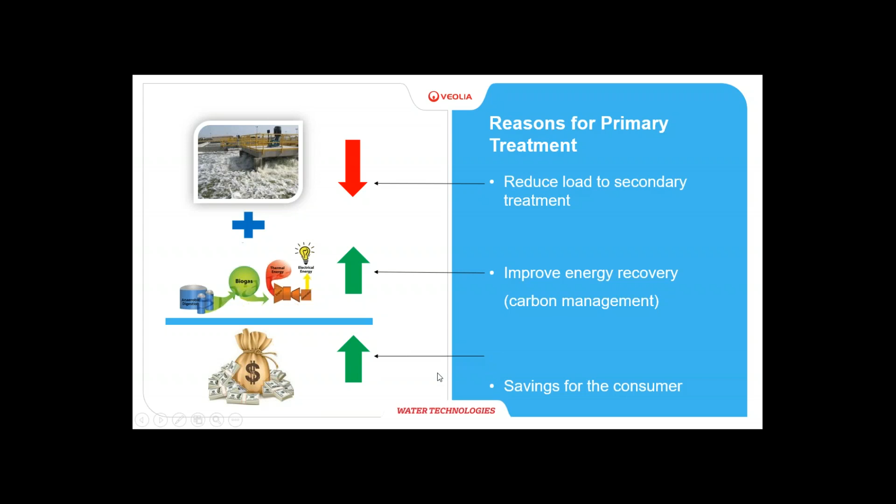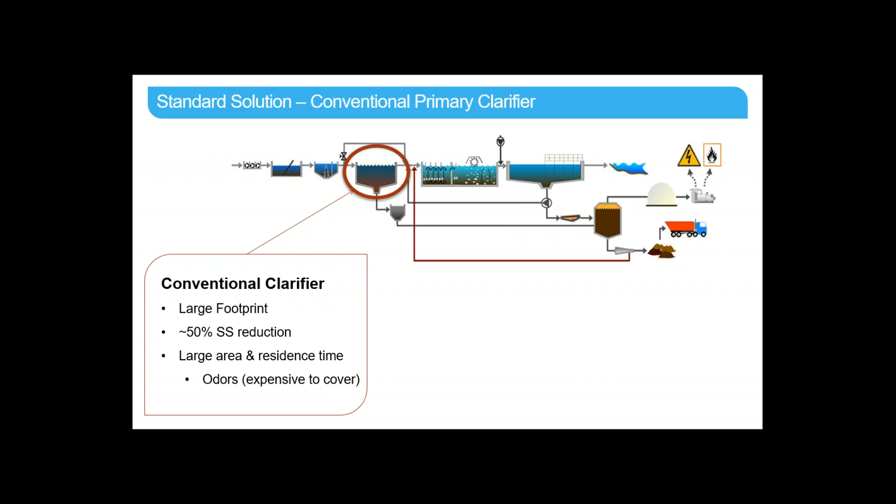In a standard conventional plant, normally we would do this with conventional primary clarifiers, a large footprint device, large area, and large retention time. You would expect to achieve about 50% suspended solids reduction. And one of the side items that does occur with this large area and residence time is odors. These devices can be expensive to cover and difficult at times to deal with the odors associated with that.

So when we speak of advanced primary treatment, there are a number of technologies today that are considered advanced, but in today's talk we'll be focusing on the Hydrotech technology. This is a Veolia technology. It's been in development and being sold since the 1990s. So it's a very established technology, and specifically for primary treatment has been in use since the early 2000s.

What are the characteristics of Hydrotech compared to conventional clarification? It's a very small footprint device, a fraction of the conventional clarifier, and we'll share that in more detail in just a few moments.

In terms of performance, you can also achieve the 50% suspended solids reduction that you would get with a conventional clarifier. But in addition to that, you can actually, with chemical pretreatment, achieve greater than 90% suspended solids reduction. An interesting aspect to this is that the removal, whether of TSS or total phosphorus, COD, these can be targeted using a chemical pretreatment scheme.

These units are covered. They have a short residence time. The operation and maintenance is very easy and straightforward. As we talked about the side issue with the conventional clarifiers being the odors, here with this technology, the odors can be reduced and are much easier to control because of the covered nature of the units as well as the short residence time.

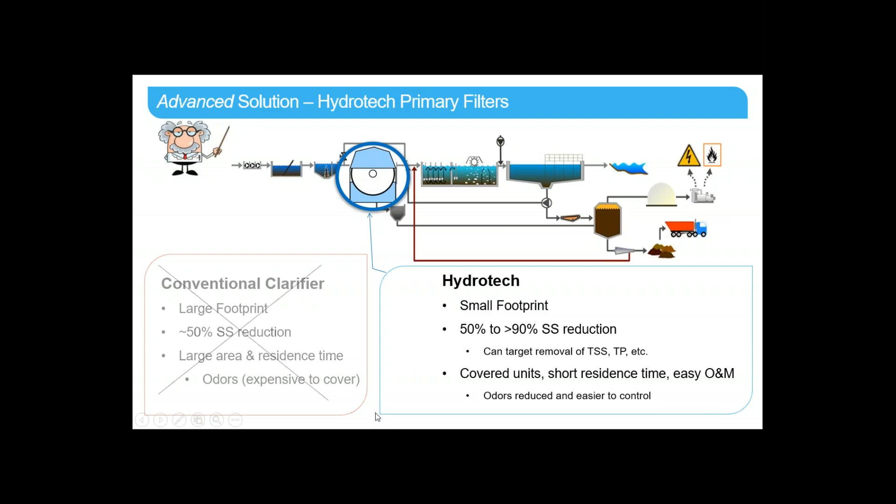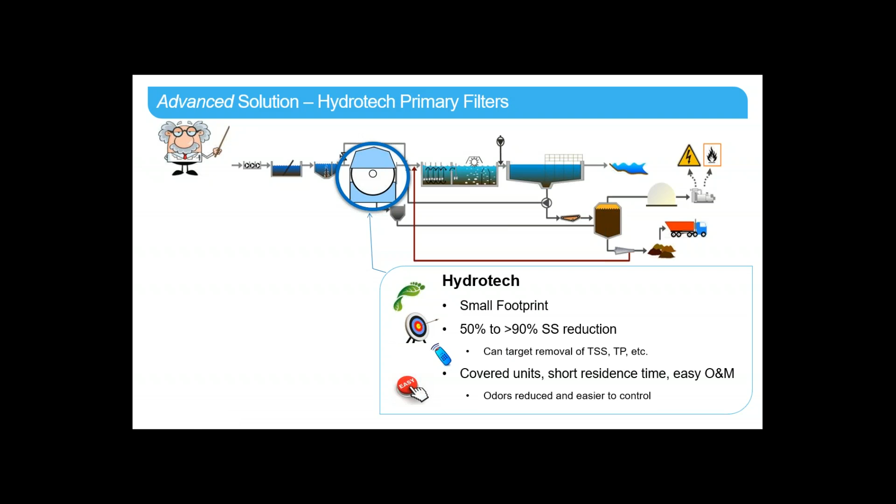So in today's talk, we're going to focus on 4 key areas of benefits with this technology: footprint, performance, control, and the easy operation and maintenance associated with the technology.

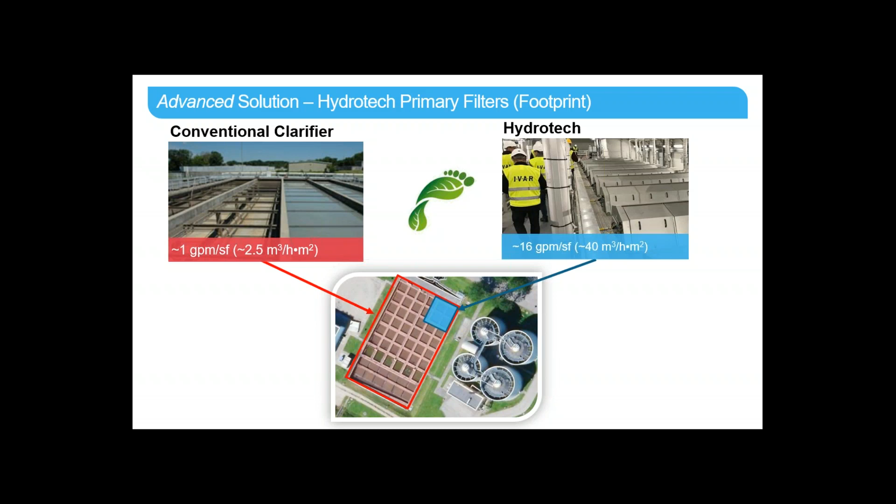So we'll move first into the footprint aspect. Compared to conventional clarifiers, the benefit is fairly straightforward and easy to see. A conventional clarifier would typically be designed at about 1 gallon per minute per square foot, or about 2.5 cubic meters per hour per meter squared of footprint area. With the Hydrotech filters, you can design these up to about 16 gallons per minute per square foot, or about 40 cubic meters per hour per meter squared. So as you can see, a fraction of the footprint is used compared to conventional clarifiers for the Hydrotech technology.

I thought it'd be interesting to share a specific site reference here, a location in Stavanger, Norway. This is a plant designed with 500,000 population equivalent. The peak flow design is 65 million gallons per day, or just over 10,000 cubic meters per hour, and they see inlet TSS up to about 300 milligrams per liter.

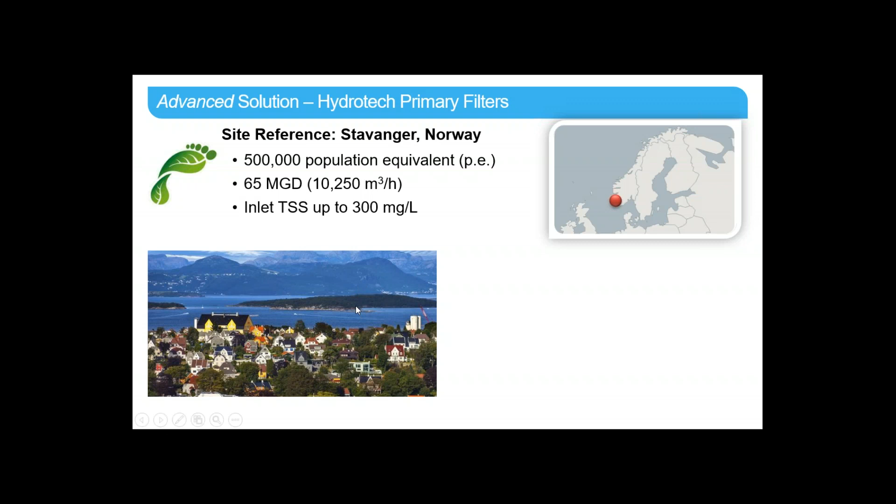Beautiful location in Norway, but you'll also notice that it's quite mountainous. This was one of the big challenges with this site: when they were looking at this location for their primary treatment, they would be needing to put it inside a mountain. This location is quite landlocked, so the primary treatment would be going inside caverns. The cost of installation was at a premium in order to locate the primary treatment within the mountain at the site.

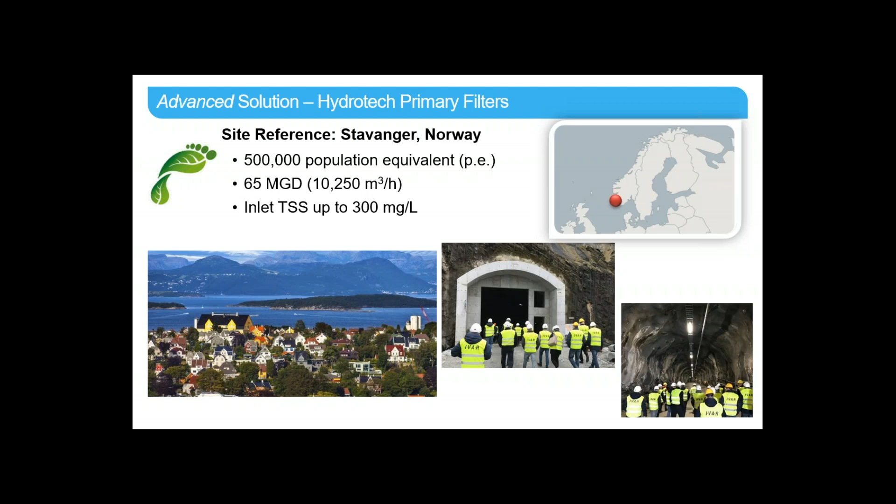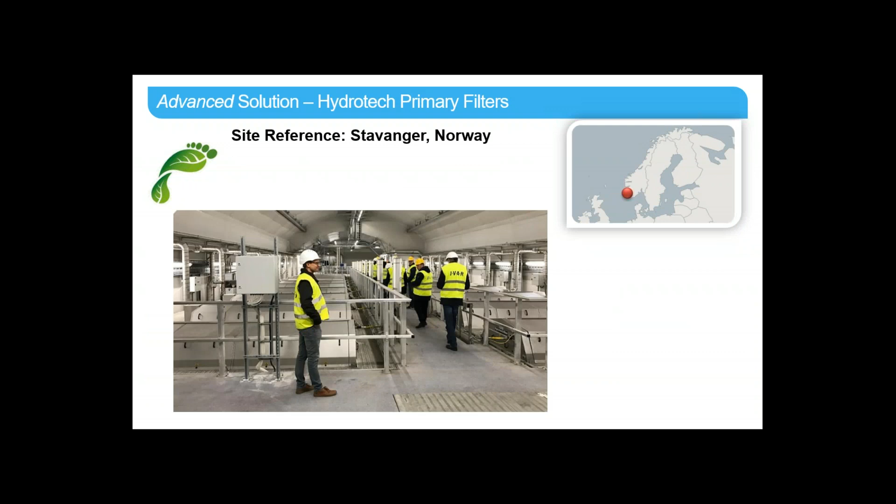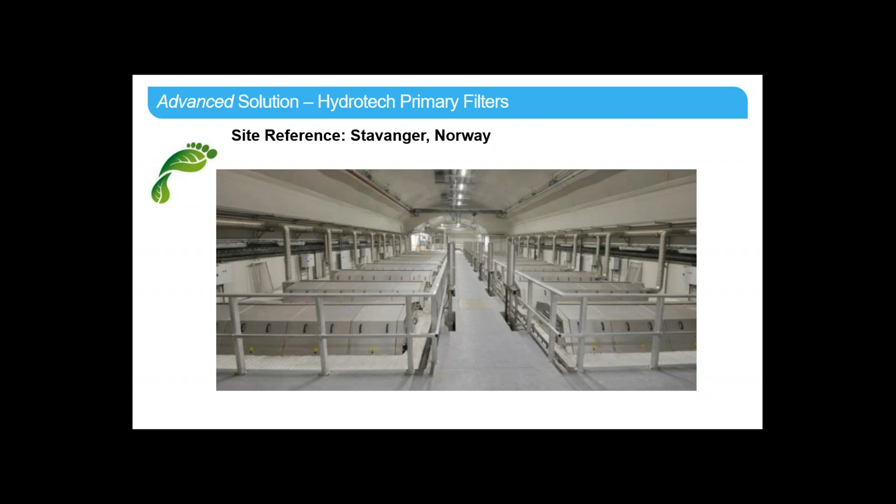The site looked at a number of technologies, both conventional as well as other types of advanced primary treatment technologies, and did select the Hydrotech filters. You can see here the location inside the cavern where the filters are installed. This has 20 of our drum filter units up and running here now for about a year or so. I believe the startup date was early last year, 2017, here in Stavanger, Norway.

So that highlights the footprint advantage. And at this point, I'm going to turn the presentation over to my colleague Carlos, and he's going to be sharing about the aspects of performance.

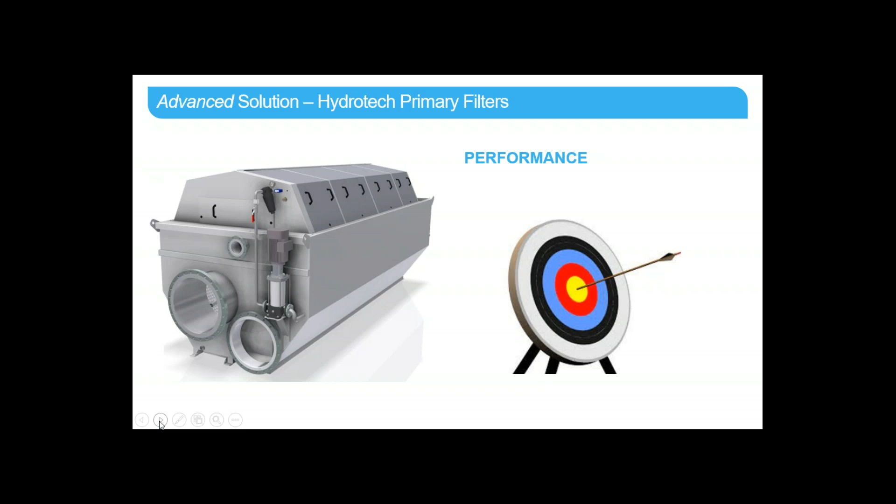Thank you very much, Mark, and thank you everyone for being there. I would like to invite you all on a trip around the world in order to showcase the performance of our machines when they are installed in a primary treatment line.

Before we do that, I would like to introduce you to the different modes of operation for Hydrotech filters in primary wastewater treatment. You can choose to operate the unit in 3 different ways. You can decide not to use any chemicals, in which case you will achieve an average removal of about 50% of TSS. If you add a bit of polymer upstream in a flocculation tank and allow the flocks to get larger and stronger, you will be able to boost the TSS removal up to 90%. If you further add some coagulant upstream of the flocculation tank, you will not only increase the removal by 5% compared to the previous case, but you will also be able to remove some phosphorus.

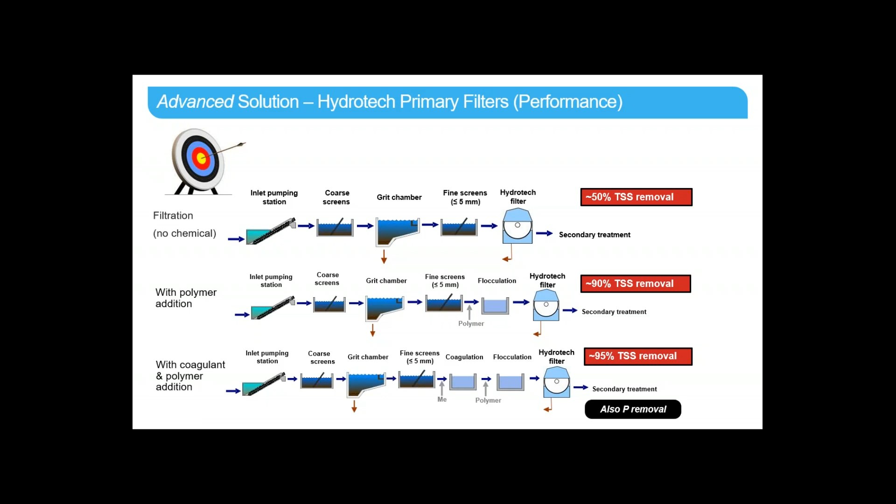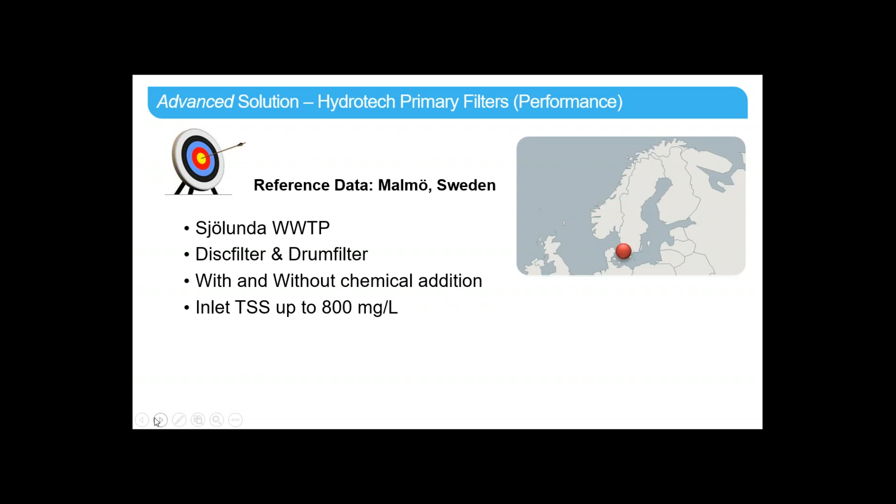So let's start our trip in Sweden, home of Hydrotech. We performed some pilot tests in the Sjölunda wastewater treatment plant located in Malmö. We piloted with both disc filters and drum filters, with and without chemical addition. And here you can see the results. In blue and gray, you can see the performance of both disc and drum filter without chemicals.

As you can see, the dots align quite well with the removals that I mentioned before. We were able to achieve more than 50% TSS removal on average. When we added a bit of polymer upstream of the disc or drum filter, those removals, shown here in yellow and blue, got enhanced to 90% on average, as you can see in this graph.

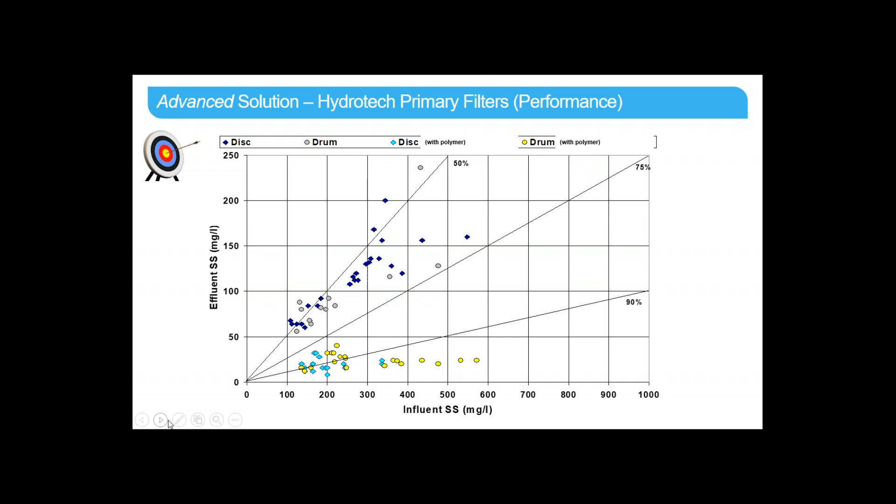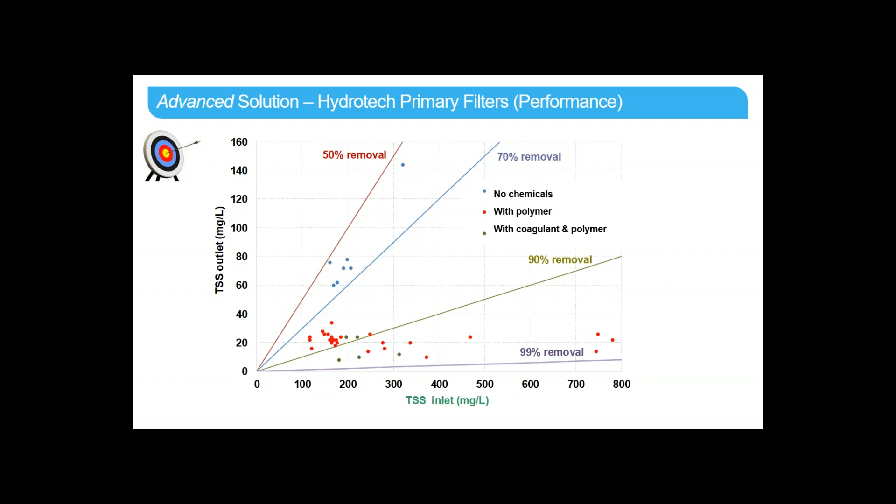Here you can see another data set that confirms the numbers I have already presented. In blue, you can see the removals achieved without chemical addition, which were in average above 50%. When adding a bit of polymer, the removals got between 80 and 90% in average. In green, you can see the removals we were able to achieve when both coagulant and polymer were added upstream of the filter. In that case, the removals of TSS were above 90% in average, and we were also able to remove phosphorus.

This is not just something that we are saying ourselves and that we have tested ourselves. It's also something that has been verified and validated. Hydrotech is the only primary treatment microscreen technology that's in the ETV register for green technologies. The ETV register is basically a database of green technologies with different claims, and those claims must be validated by an independent ISO 17020 certified verification body.

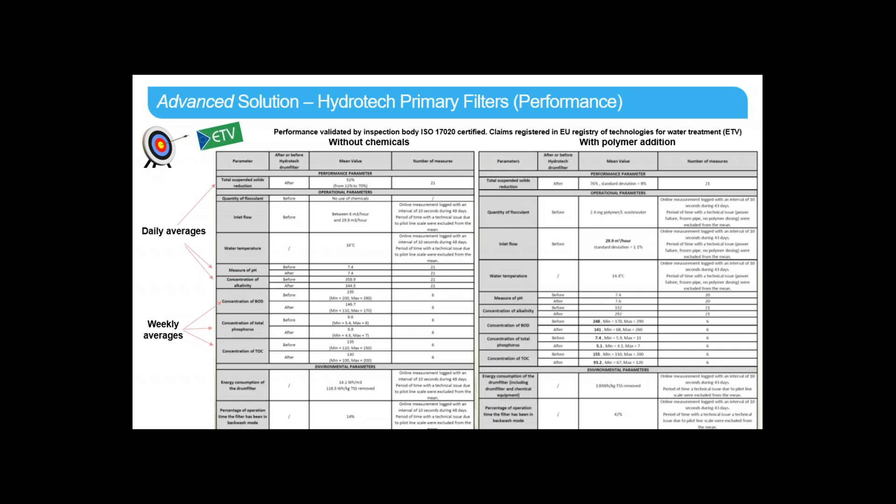Here in these two tables, you can see the results from that verification, both without chemicals on the left and with polymer addition on the right. The results in terms of TSS removal are in line with what I mentioned before. If you don't add any polymer upstream, we were able to achieve 51% TSS removal in average. By adding 2.4 milligrams of polymer per liter, we were able to achieve 76% TSS removal in average. You have to be aware that the removals can be enhanced if higher polymer doses are applied in the system.

Please, let's continue our trip through Denmark. In the north of Copenhagen, we have the Mölleåverket wastewater treatment plant, where they have 4 primary clarifiers. You can see them highlighted in red. They had some issues with them and needed serious renovation. So the client selected Hydrotech to perform primary treatment with chemical addition upstream, because they wanted to control the COD removal and release some of the primary clarifiers for water storage purposes.

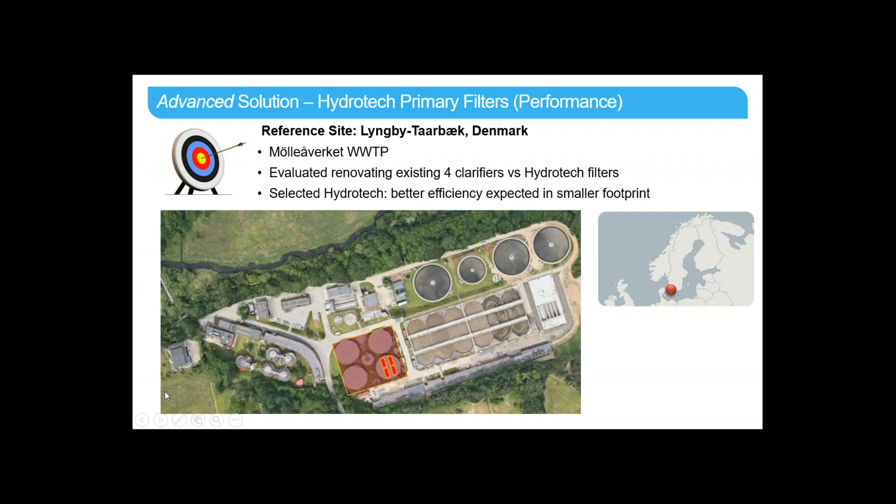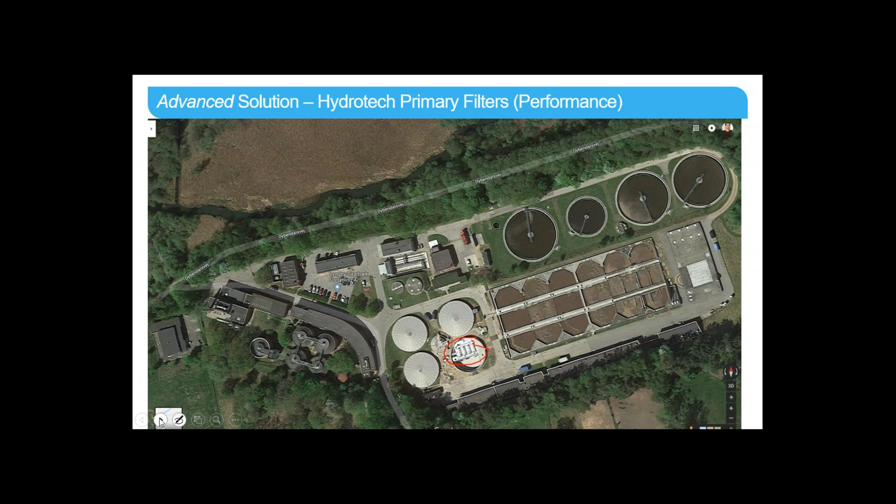The plant is still under commissioning. It's able to treat 925 liters per second. Here you can see the effluent turbidities recorded over the last 15 days. As you can see, the average turbidity out of the drum filters has been around 100 FNUs. The inlet to the plant is about 250 to 1000 milligrams suspended solids per liter. The first results we have analyzed in the lab suggest removals of about 70 to 90% in terms of TSS.

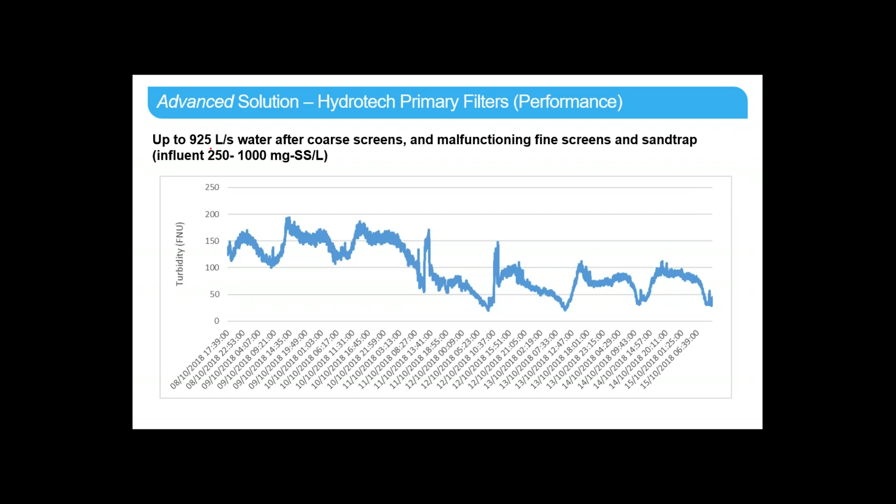Let's continue our trip, and this is actually our last slide referring to data. The trip continues in Sweden, central Sweden. The city of Avesta has a wastewater treatment plant called Näs, which was started up in 2010. They have a drum filter and a 2-stage chemical precipitation system upstream in order to remove phosphorus. The highlight of this installation is that the treatment line is purely mechanical. There is no biological treatment.

Here you can see how the filters were able to remove more than 85% of the TSS in average, and how the phosphorus out of the drum filters was always below 2 milligrams per liter, which is the target effluent demand for phosphorus in this part of Sweden. The concentrations in the inlet of the drum filter were as high as 12 milligrams of phosphorus per liter.

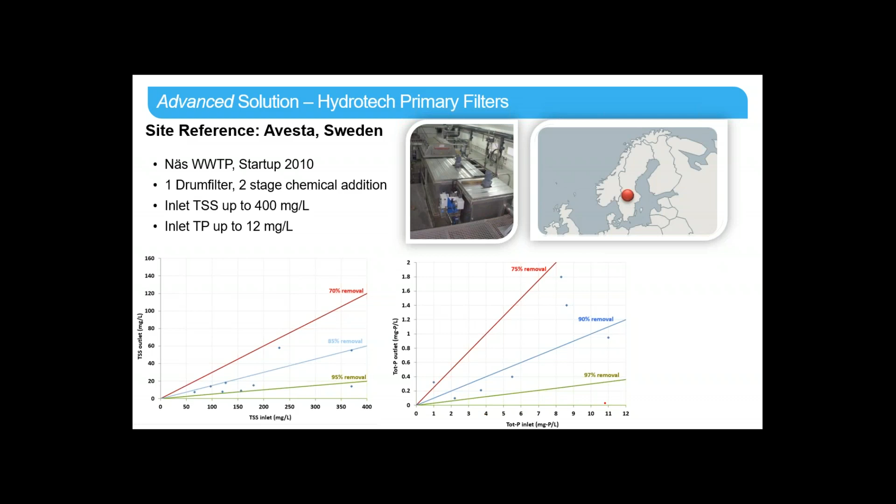Some of you may be thinking if all this chemical addition makes sense, and this slide is actually for you. This is a life cycle assessment conducted by an independent body in Germany, the Competence Center of Berlin. They benchmarked 3 different technologies in terms of cumulative energy demand and global warming potential, under the same conditions, meaning all 3 plants were receiving the same influent, and all 3 sets of technologies had to treat the water down to the same target values in the effluent. Here you have the legend for the different factors contributing to both the global warming potential and the cumulative energy demand.

And you can see here how the microscreen with chemical pretreatment upstream actually benchmarked better than the reference conventional activated sludge without primary treatment, both in terms of cumulative energy demand and global warming potential.

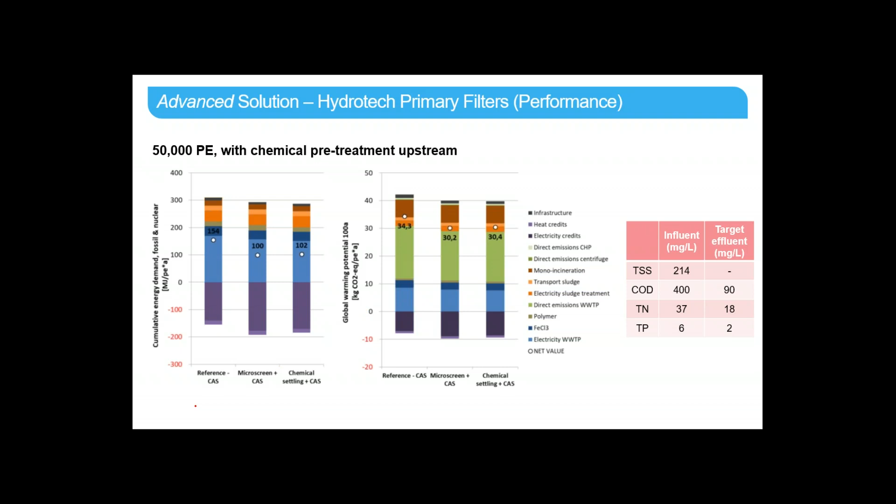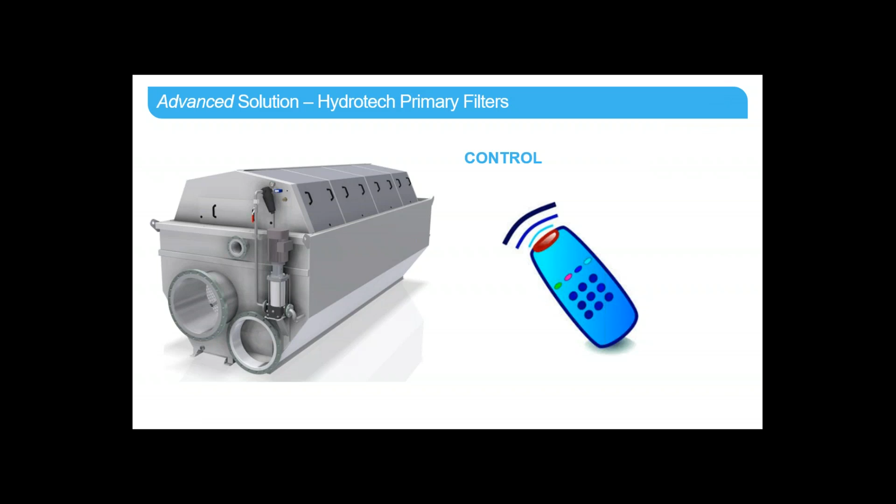Thank you so much, Carlos. We're going to be moving now to the third topic for the benefits, and that's the aspect of control. I think a good key question to ask is, why would it be important to have any type of very detailed control on the carbon removal? So I just highlighted a few key things here.

One would be to minimize aeration costs. As we said from the outset, that's definitely a big cost contributor at the wastewater treatment facility, perhaps the largest. But we've seen in our calculations that the chemical dosage costs associated with polymer addition upstream of the Hydrotech primary filters is actually quite a bit less than the savings achieved from reductions in aeration. In other words, it would be a benefit to the client, even though there may be some added cost for dosing the chemicals associated with the added removal. That added removal would result in a savings, a reduction in the aeration, and an overall savings to the client.

Next, of course, would be to maximize the biofuel production. The more we can remove, the more we can send to the anaerobic digestion, and the more energy that we can produce out of that carbon. However, having said both of those two bullets, it's important to put those together with the third, which is to stabilize the carbon to nitrogen ratio.

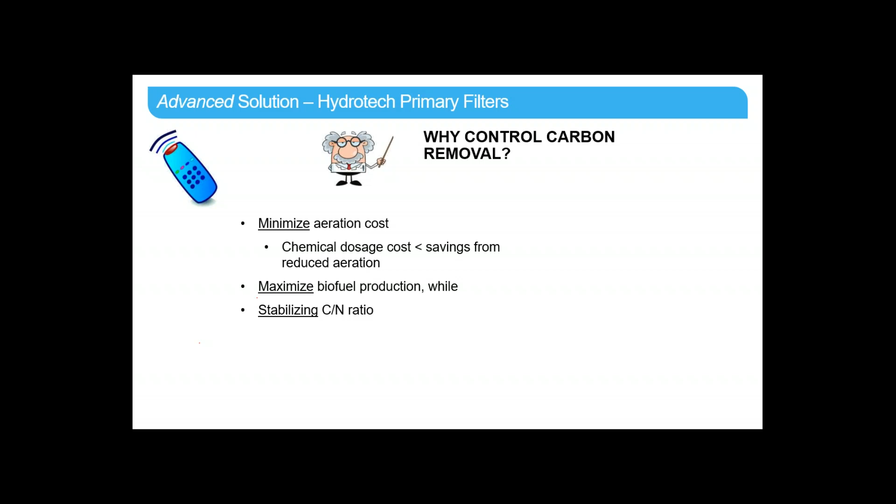When we talk about that, it may be helpful to think about an example. Say an example wastewater treatment plant may have an influent total nitrogen of 35 milligrams per liter. A desired carbon to nitrogen ratio is typically about 8:1 to achieve full denitrification using that incoming carbon. We'd like to eliminate the need to remove so much carbon that we then have to introduce another source of carbon prior to the biology. We don't want to add cost in later because we removed too much carbon.

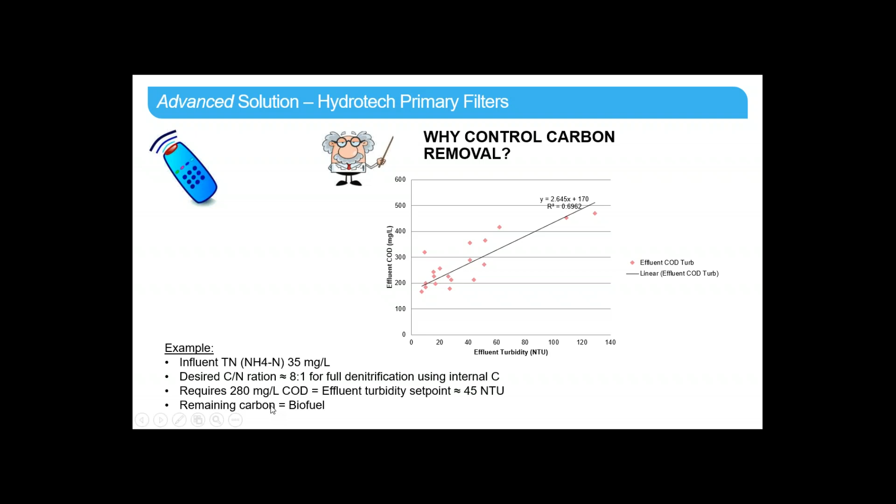So if you look here at this graph, this is an example relationship between COD and turbidity, and you can see it tracks fairly well. If we want an 8:1 ratio of carbon to nitrogen, and our nitrogen is 35 milligrams per liter, that would mean our carbon target would be 280, 8 times 35. Looking at this relationship, 280 would target about 45 turbidity as our target after primary treatment going into our biological system. All the remaining carbon that we would then be removing out could be used for the biofuel.

We've done this a number of times using a fairly straightforward PI, or proportional integral, controller feedback control loop. This is not something new, it's about 100 years old. It's well-proven technology, a well-proven algorithm to do this. You could also combine this with feed-forward control. Combining feed-forward control with PI feedback control is a bit more complex algorithm, but it does give a faster response. But we've actually seen with our application that this is probably a bit more complex than actually needed, that the basic PI feedback control loop really achieves very good results.

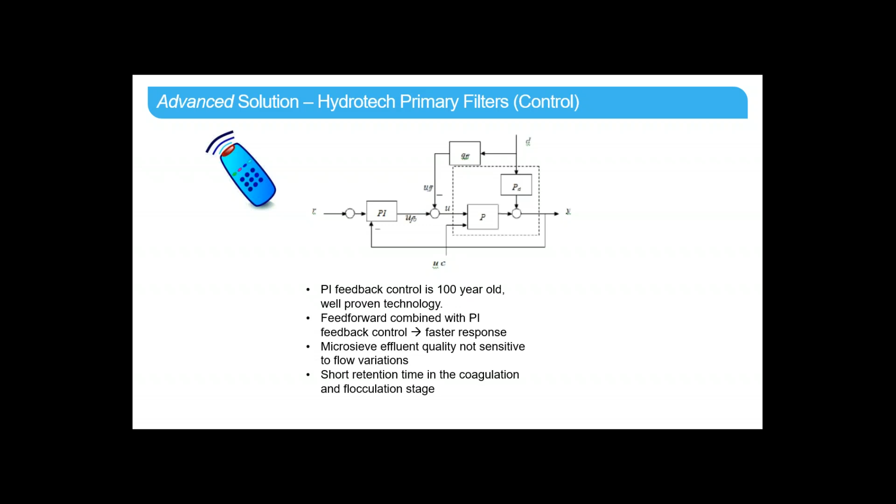We've also seen that our effluent from the Hydrotech filters is not really sensitive to flow variations when using this type of control system. I think a big part of that is the short retention times we see, both in the unit itself, which has a very, very short retention time, as well as in the coagulation and flocculation stages ahead of the filters. If coagulant is used, typically we're talking a 2 to 3 minute retention time, and with the polymer stage, about the same. So if only polymer is used, you're only looking at a 2 to 3 minute retention time stage, and even with a combined coagulant and polymer, a total of a few minutes to maybe a max of 10 minutes total retention time when those are added up.

And how is this done? You can see here a little basic schematic. We would take a PLC, with feedback control taken from an analog measurement, for example turbidity, feeding back to the PLC and controlling, using the PI control algorithm, the chemical feed, polymer and or coagulant. And as I said a minute ago, to make this faster, you could add a feed-forward aspect, using flow or turbidity feeding back to the PLC, to provide an even faster response on the control. I've got a couple of photos here to show both pilot setups that have been done as well as full scale.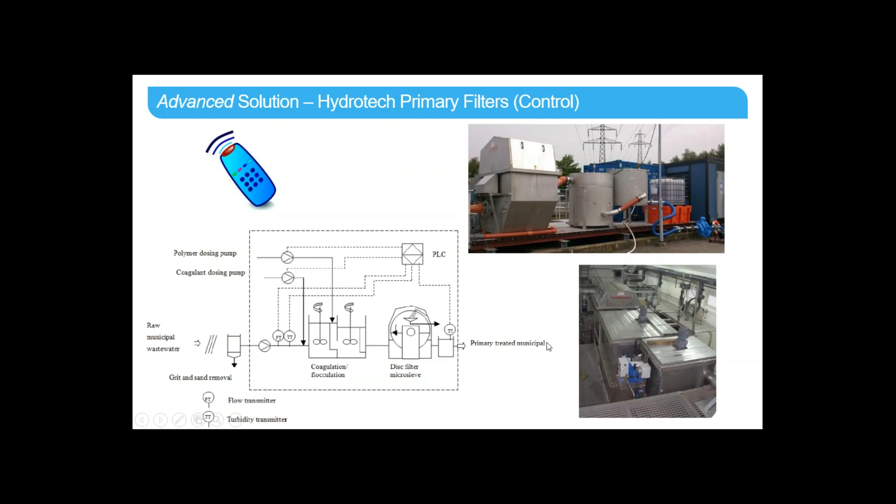Okay, so here's a graph to show some of these results.

Up at the top here, this gray trend is the coagulant dose for this particular trial that was run. The blue is the polymer dose. So both of those are being controlled. The red is the inlet turbidity. You can see the variation here in the inlet turbidity. The green line trend at the bottom is the effluent turbidity. And then finally, the black lines are the set points that were used for this particular trial.

It can be seen that the response here is excellent on the set point. So even with the adjustments, the controller was able to operate the system and give good response to track those set points through those variations in the set point and get a good response on the outlet turbidity value.

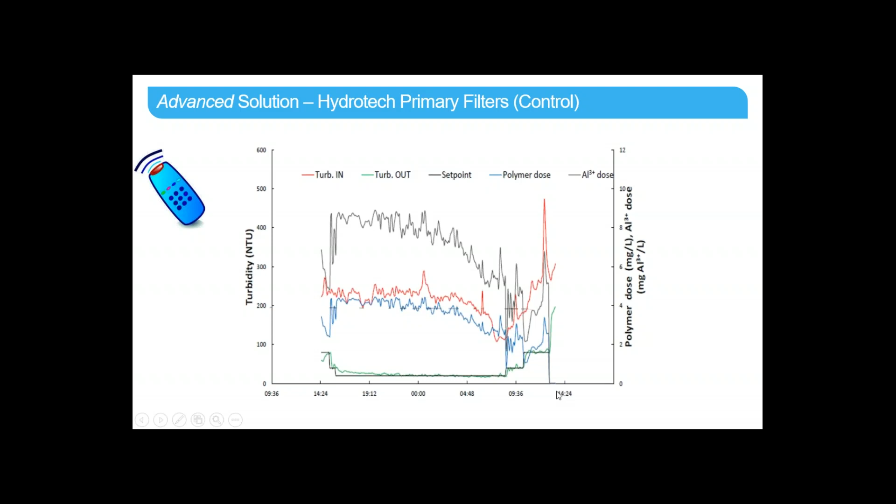This next graph again shows the same thing here, the turbidity being red in, the outlet turbidity being green. The black bars here are the set points. You can see two set points in this particular case. And the polymer dosage here in dark blue. The light blue is flow and is interesting to look at because of the flow variation.

So we said earlier that the results could be maintained without sensitivity to variations in flow. And so we saw that here with flow ranges of plus or minus 100% on the flow. We still were able to maintain very good effluent performance, consistent effluent turbidity value using this control scheme.

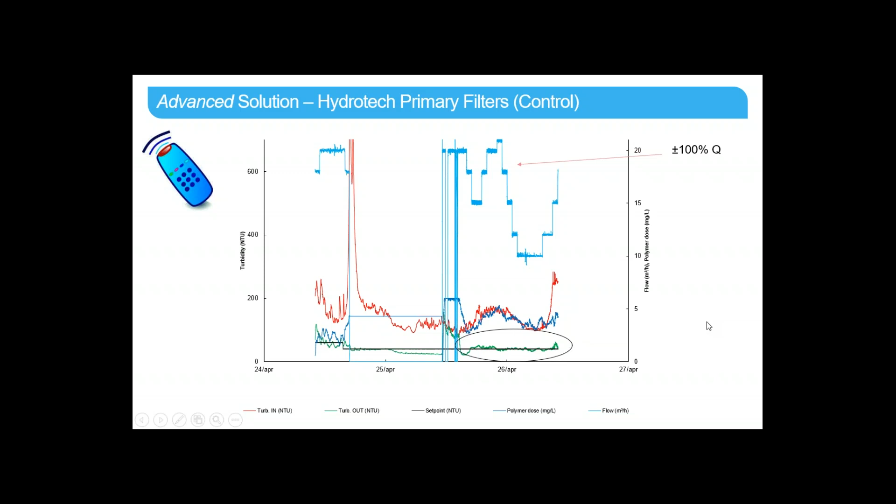A question that will often be asked is, it may be that you've demonstrated this in a short-term pilot of hours or days, but what about long-term? And so here we actually have data collected over about, as you can see here, 15 to 20 days runtime.

And the controller is looking at the feed, it's a feedback, so it's looking at the effluent and really trying to eliminate that error, either plus or minus, by adjusting the chemical dose. So it is self-stabilizing around that desired set point. And as you can see here, it was able for a good duration, about 15, 17 days of operation, to maintain that, with the exception of this one location here where we ran out of polymer.

And that is difficult to maintain the set point when we did not have the chemical addition, of course. But once we were able to correct that, which happened going into a weekend, we quickly saw that trend return and were able to hold that through the remainder of the study here, very close to around that target value that we had set of 50 turbidity.

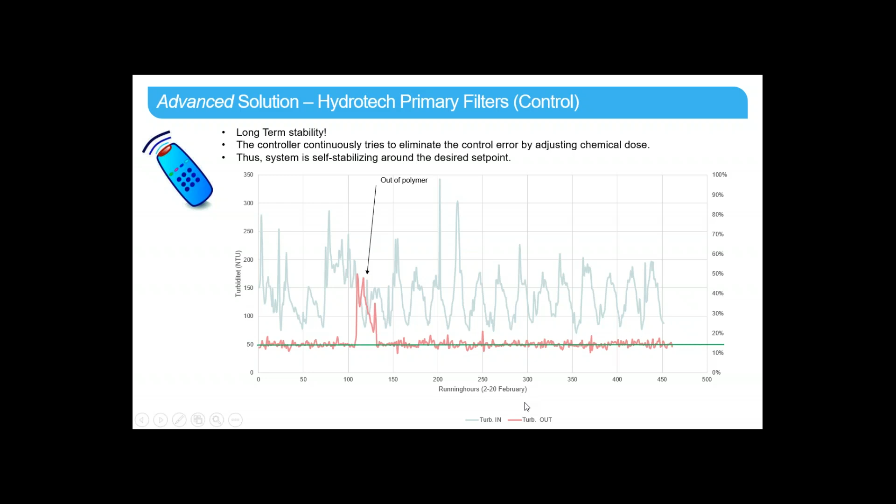Now finally here with this set of data points, on this particular graph we have the turbidity in represented with the blue trend. The gray trend is representing the effluent turbidity, and the orange trend is the polymer dosage. Our target here set point was 50, and the average over this period of time, this gray trend, the average was just over 50. So we can see here that definitely this control scheme worked. It maintained the average throughout this time period of this trial at the 50 turbidity.

On the left-hand side here, we have the actual dosage between 0 and 6 milligrams per liter for the polymer dosing. And it's interesting to note that with a feedback control, we're actually targeting and putting the correct amount for the desired effluent set point. And the importance of that is that while other systems perhaps would use just incoming flow and set a milligram per liter based on the incoming flow rate, this method actually targets the effluent value and doses according to that feedback.

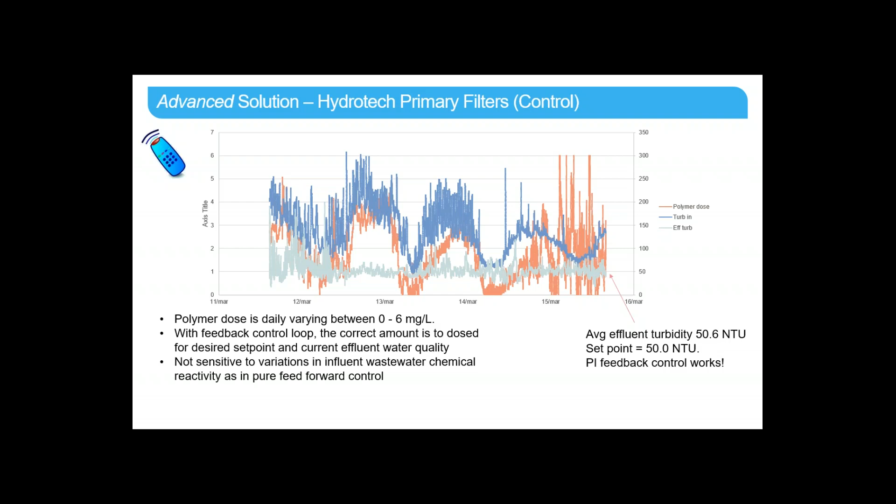And we actually saw with this facility that they were seeing periods of time where they had reject water streams from their centrifuge coming in and out at particular times. So that would not have necessarily been picked up at the inlet measurement point, whether of flow or turbidity, but could be seen at the effluent and impacting the effluent. And so the polymer dosage there being tied to that was an important aspect to maintain that effluent target control.

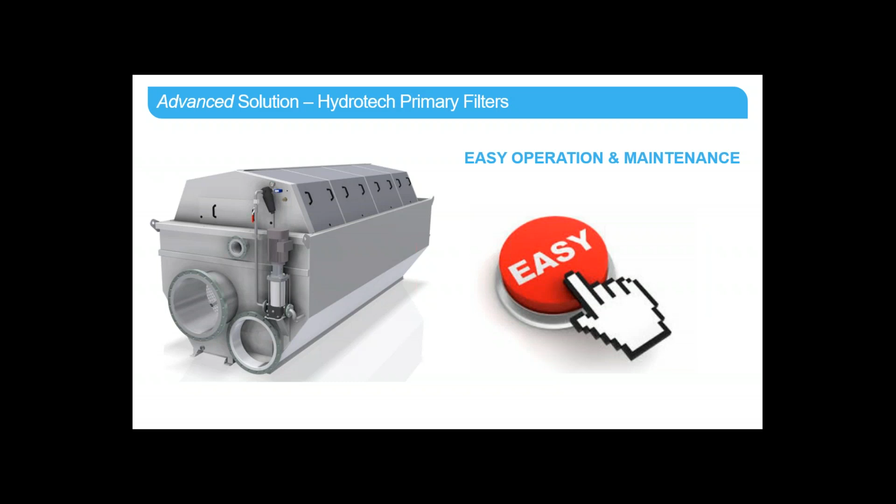So now moving from the control aspect, we'll pick up our final benefit topic, which is easy operation and maintenance. We'll just highlight that in terms of the actual inspection tasks and access, the technology is very simple and straightforward.

The background for the Hydrotech technology is for the aquaculture industry. In that industry, anyone that's a fish farmer wants to spend most of their time where they are getting their livelihood, which is the fish. So the thought process has always been to try to minimize this technology, which is a wastewater treatment device in those aquaculture plants. From the founding principles of the technology were to try to make it as simple to operate and maintain as possible, and that's been maintained even for our applications here in the municipal and industrial environments.

You can see access to the filter media is very quick and simple, easy to see by accessing the covers, easy to replace as needed.

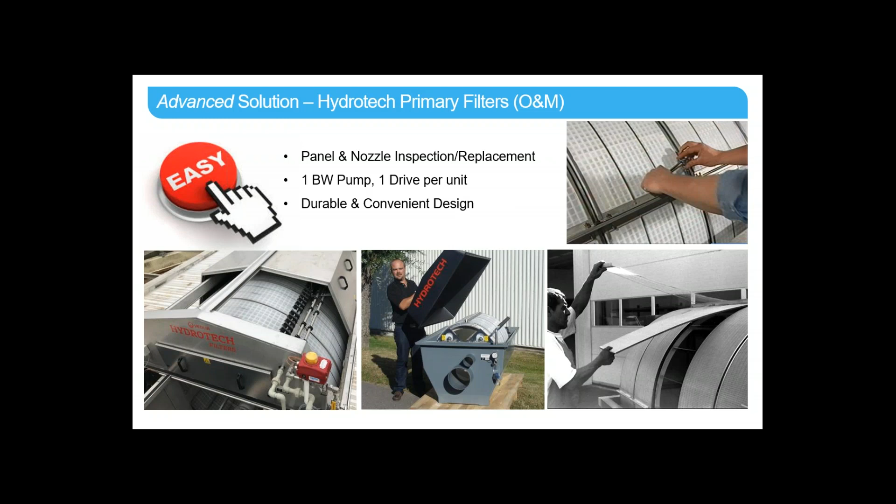I think it's also important to note that the durability of the technology is a premium. The media, we have many sites operating at 10 plus years with original filtration media, even sites with over 15 years of original filtration media on their machine. So both it is convenient as well as durable, making operation and maintenance easy to do and easy to understand.

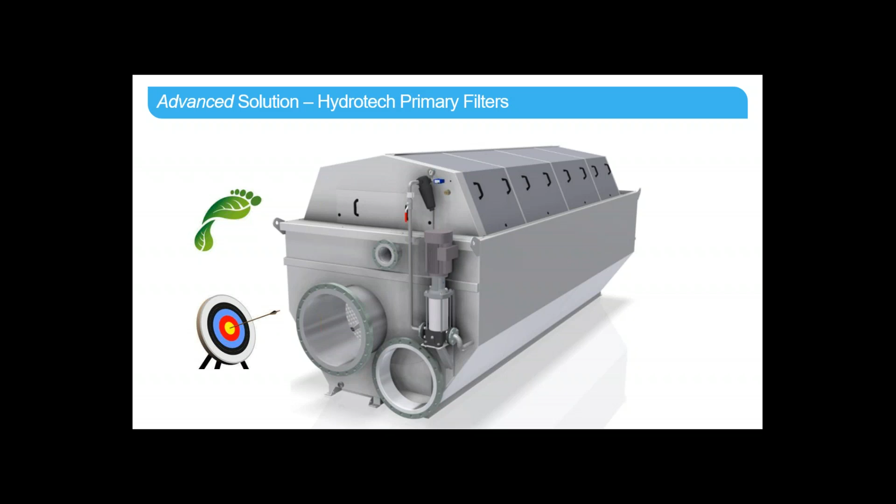So that highlights our benefits we wanted to share with the Hydrotech primary filters. Benefits being footprint, much smaller than conventional filtration and smaller than even other advanced technologies on the market today. Performance, knowing what the performance can be achieved, knowing that it can be achieved consistently and being certified even by third-party organizations. The control aspects, being able to control the performance to dial that in for a plant-specific needs. And finally, easy operation and maintenance, something that's important to every person that's working in a wastewater treatment plant.

Thank you so much for participating here, and we're ready now to take some questions.

All right, excellent. Thank you, Mark. So we have a few questions here. We'll have about 10 minutes to go through these. So I'm just going to start going down the list. In your advanced primary treatment, how can you recover TP for reuse?

Yeah, so I think what you're referring to there is related to recovering the phosphorus for example, beneficial application. Carlos, I don't know if you have comments here.

I think if you're collecting at the primary stage, that would be going to anaerobic digestion. I'm not sure how simple that would be. Do you have a comment there, Carlos? No, it would go through anaerobic digestion, and then part of the reject will come back to the inlet works. That fraction of the phosphorus coming back to the inlet works can easily be recovered with struvite-based approaches, I believe. But as you are totally right, Mark.